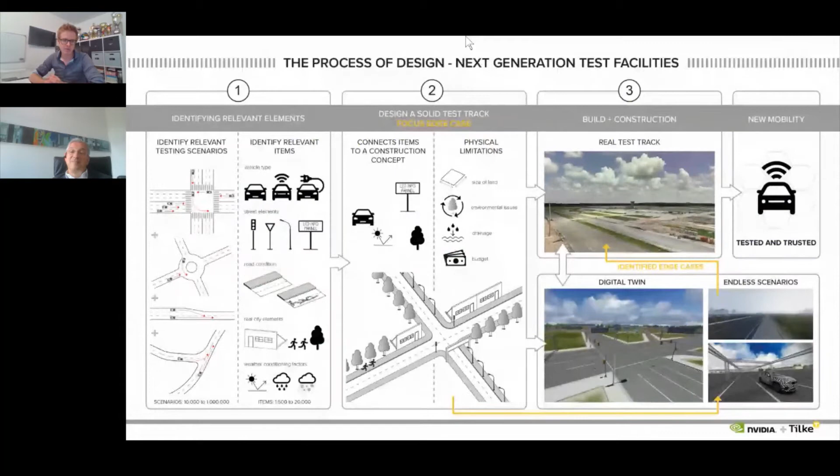Thank you. As Manuel mentioned, there's no better way to test an automated driving system than in the real world, whether it's on a test track or on public roads. The level of fidelity is really unmatchable by simulation, but there are obvious limitations with testing in the real world. The resource issue already mentioned, the scalability, the time - this is all a real bottleneck for the deployment of automated vehicles.

If we could only test in those real world environments, in order to generate enough evidence that can be given to an approval authority or an assessor to demonstrate that the ADS is robust, reliable, and safe inside the entire ODD in which the ADS will operate, we need other mechanisms to generate that data. We need to use simulation to support this.

At NVIDIA, we use simulation at multiple points during the development and what will be the certification of our automated driving systems. We have point 3 here, which mimics what Manuel's been saying about doing the testing - both the automated driving system on a track, and in the digital twin, where you have closed loop testing with the full AV stack. This is with the complete tool.

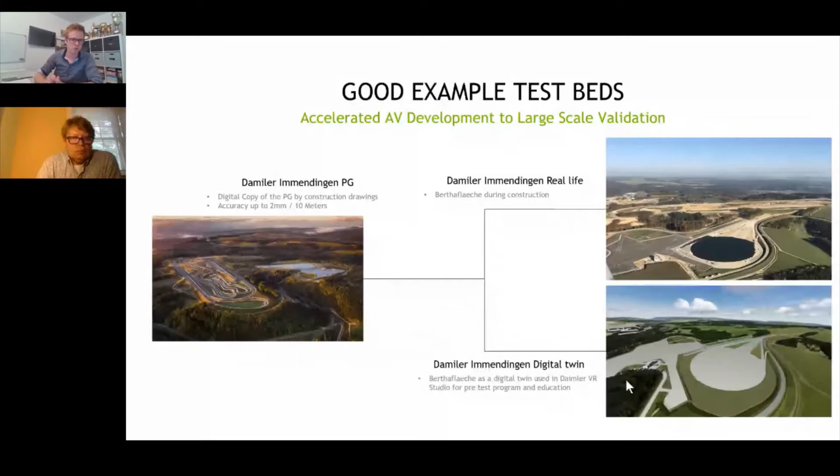Thank you. So now going back to the digital environments, the majority of these virtual testing tools are run on game engines, and this is something that at NVIDIA we're moving away from. At NVIDIA we love game engines—we have a rich history in computer graphics technology. They generate beautiful images, but we don't believe at the moment they are fit for purpose with regards to the assessment of automated driving systems.

We need physically accurate sensors. We need timing to be incredibly accurate. Without having this level of accuracy, you generate non-deterministic effects within the simulation tool, and it would really prohibit the efficiency of regression testing—when you run the same test with the same input, tuning your path planning control algorithms, or with an updated DNN.

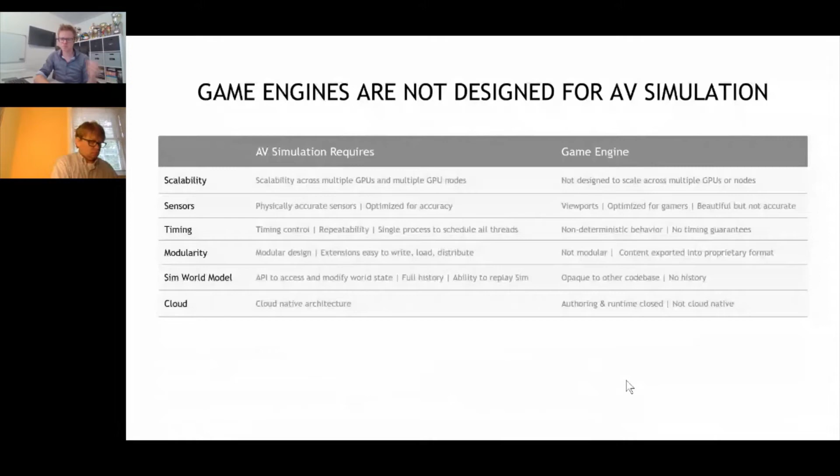So one thing that we've done at NVIDIA is to move away from the game engine we were using before, and now we've created our own platform called Omniverse. Omniverse is essentially designed from the ground up to be a simulation platform for autonomous driving systems that looks at graphics, but also looks at physical simulations and makes something that is really fit for purpose with regards to ADS testing.

It was architected to be on a large scale, to be operated not only just on someone's desktop, but also in the data center, in the cloud, where we can have multiple iterations that will increase the efficiency of testing and make something really worthwhile.

With our Omniverse as well, we've also implemented our RTX technology. This is real-time ray tracing that is far more accurate at representing radar, LiDAR models than what we had with previous tools, where we're just sort of rasterizing the images and making assumptions about where or how much reflection we get from that object.

With ray tracing, we can really look at how light interacts with an object, how it's reflected at different angles, and have something that is far more usable.

One thing we also did was build this Omniverse on Pixar's Universal Scene Description. This is used to describe 3D scenes and works very well with the Omniverse platform.

Yeah, thank you, Barnaby. Thank you very much. Because of a matter of time, I would prefer to take the questions into the panel, or Barnaby and Manuel, if I saw that Manuel already started questions, that would be great. Thank you very much, gentlemen.

I think I just got notified that we should be able to have Philip Schreiner joining us for his presentation from the Autonomous. Is he there?

There he is. See and hear me now. Hello, yes, sorry for the inconvenience. I had no problem, Philip, we were able to manage. No worries, everything is fine.

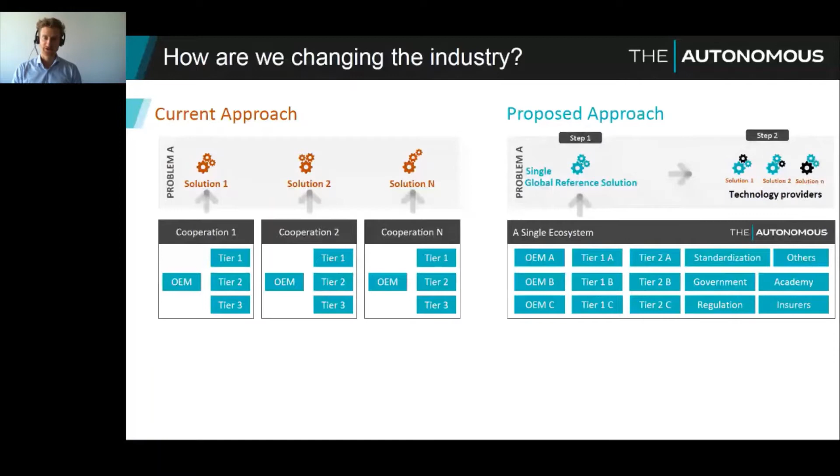Of course the tiers counting into the automotive sector, but also the lower part is important. So also academia, research, partnering, for example, with Fraunhofer Institute and other research institutions, the cities, legislation, and so on. This is really for us the ecosystem that we want to gather to jointly collaborate on the autonomous.

So this is actually why we're doing this. And now, of course, the big question is, how does it look to actually achieve this big vision? I would like to show you two streams that summarize quite well what we are doing: on the one hand side the event stream, and on the other side the innovation stream.

Start with the event stream. So of course, having an ecosystem always involves people. In the end, it's the people, it's the experts with the solution for concrete problems, and that's why you need to bring the people together.

And this we do during COVID, the COVID pandemic, we launched our Chapter event format. It's a fully virtual format which we usually planned to have in a smaller setup, but then it turned out the feedback was so good that we actually host Chapter events with up to 500 participants. The idea here was first to get the experts together, for networking, but also to start defining possible safety challenges where this alignment is needed.

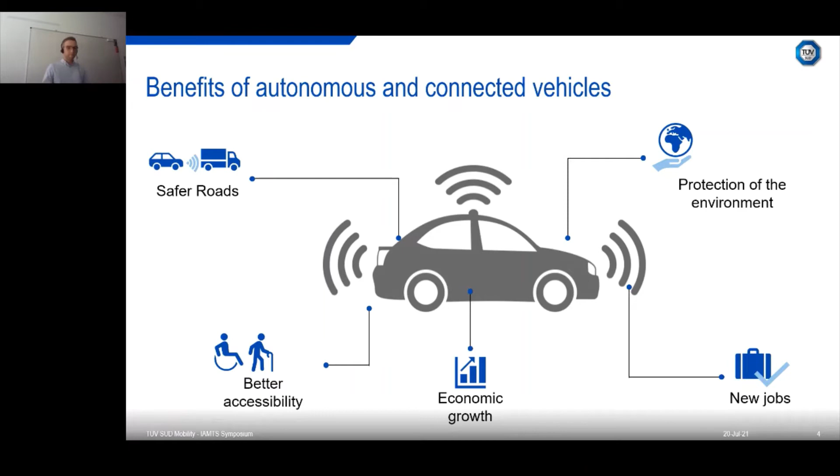But however, there are still some obstacles to overcome for this to happen. But what does it mean from the point of view of a testing, inspection, and certification company like us at TÜV Süd? So let's jump to the next slide.

I think Alex also mentioned it. Today we look at individual vehicles for approval, but in the future this will no longer be sufficient due to networking, for example. We would therefore have to look at intermodal mobility. And today we look one-dimensionally at vehicle safety.

Vehicles, for example in Germany or the European Union, are inspected at defined periodic intervals, and driver assistance systems are interrogated electronically. In the future, however, this will no longer be possible because cybersecurity, functional safety, and other topics that have not been included in the scope of periodical testing to this day will have to be taken into account.

Also, due to the constant changes and adaptations, it will not be enough to rely only on fixed time intervals, like, for example, 2 years. A new car in Germany is checked after 3 years the first time. For this solution, it will be needed to enable and check continuous adaptations of these vehicles.

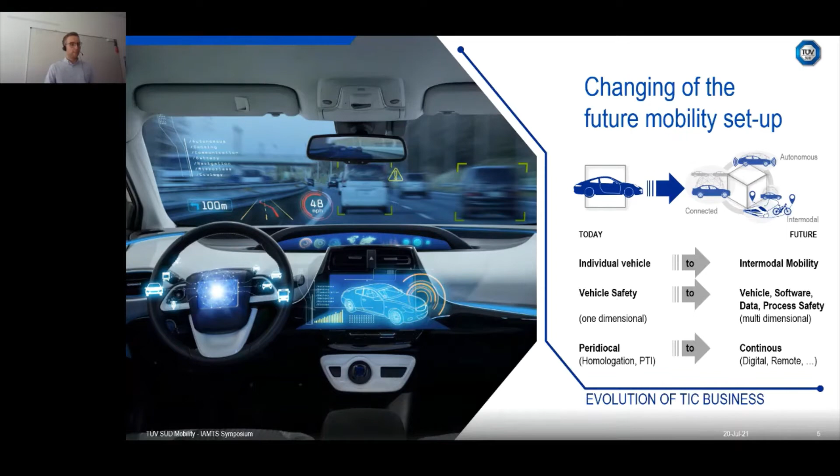For example, the UNECE regulation 157, which regulates automated lane keeping, is one of the first examples. Another one is the German Act on Autonomous Driving and the Autonomous Vehicle Approval and Operating Ordinance. It's called the AFGBV in Germany.

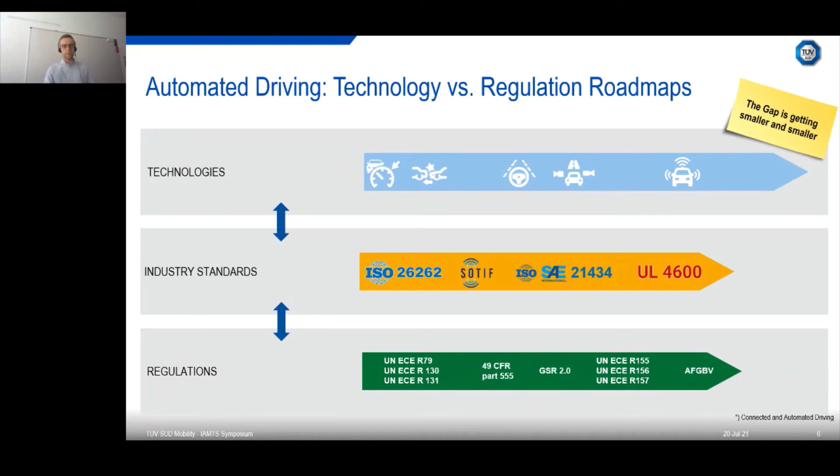But what are the opportunities for level 4 vehicles internationally? Today, I would like to focus on Europe and the USA and only briefly touch on China. My colleague Joseph will go into more detail about the Asian market tomorrow. In addition, I would like to show you how a level 4 release can look like using the upcoming German Act as an example. So let's start with the activities on a UNECE level.

As the UNECE has already recognized, for a successful rollout of new technologies it is necessary to define requirements for the technical systems and also for human behavior. The legal act of the UNECE, the Geneva and Vienna Act of 1949 and 1968, provides the framework for this. For this purpose, the UNECE defines technical requirements for such systems in the Working Party 29. Therefore, the Working Party has defined a framework document to create the necessary conditions for such global harmonization, to enable highly automated driving - that means level 3 to level 5.

The special thing about this is that these developments take place on the basis of two agreements, the 1958 agreement and the 1998 agreement. This means that the created requirements and test methods can be applied internationally in all relevant markets. For this purpose, 13 key issues were created that are valid for all participating countries to establish a uniform process. Also, to achieve this goal, several working parties were established under the Working Party 29 of the UNECE. One of them is the Working Party on Automated/Autonomous and Connected Vehicles, the GRVA, which is the umbrella of all relevant automated and connected driving activities within the UNECE.

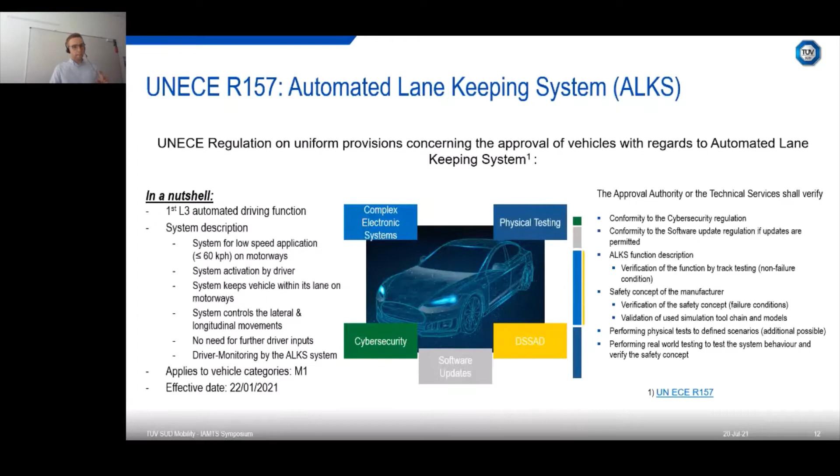In general, these are the puzzle pieces that are also intended for future releases of AD systems. ALKS is a level 3 system, but it will also be interesting for level 4 and 5. These missing puzzle pieces are also part of the FRAV and the VMAD, and they are under Working Party 29, also trying to close that gap and find the missing puzzle piece.

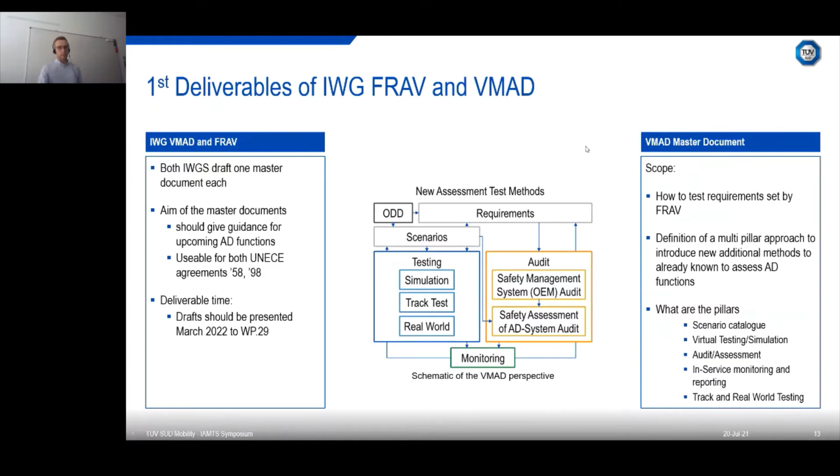So after the UNECE, let's go over to the United States. Here, in addition to the regulations of the US federal government, there are also requirements from each individual state. The NHTSA specifies minimum safety performance requirements for vehicles and equipment. The manufacturers must certify compliance before selling a vehicle, but an automated vehicle would not meet the current requirements.

But the NHTSA can approve a limited number of exemptions from the regulation, for example, a vehicle without mirrors. The individual states are regulating the licensing and usage of vehicles. This means that the test release is made by these states. But the states should follow recommendations from the federal government. This means that there are no harmonized regulations for automated vehicles in the US that apply throughout the complete country.

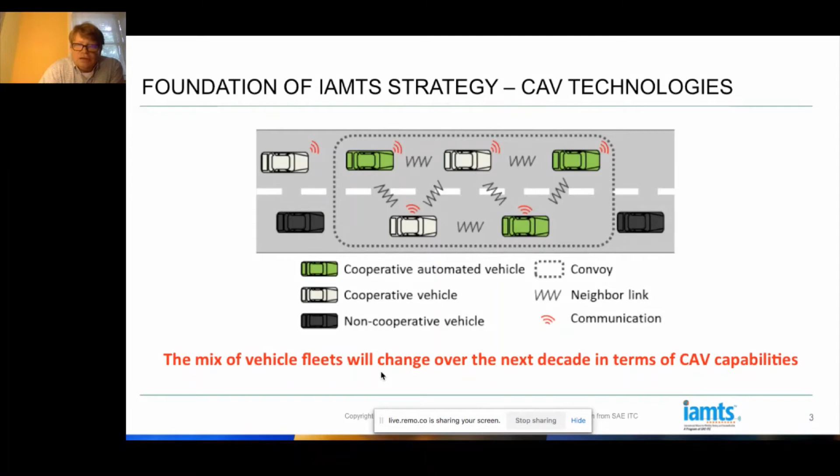And that comes with its own challenges. So if we look at the standardization situation, we are all currently at the verge of moving to 5G connected smartphones and also 5G connected vehicles. But we already have standard developments towards so-called 6G, which could arrive in around 10 years.

That means we need to look into the standards development cycles as well as the standards deployment cycles, which obviously overlap. We also need to look at the implementation of these different SAE levels, like level 3, 4, and 5, where at the moment the industry is really commercially focusing more on level 3 systems. But from a standardization and certification perspective, we need to get ready for level 4 systems as a next cycle, and then ultimately for level 5. So that standards development situation is very important.

And then we also have standards development that link to the internal network in the vehicle. So we have to look at all those developments in parallel.

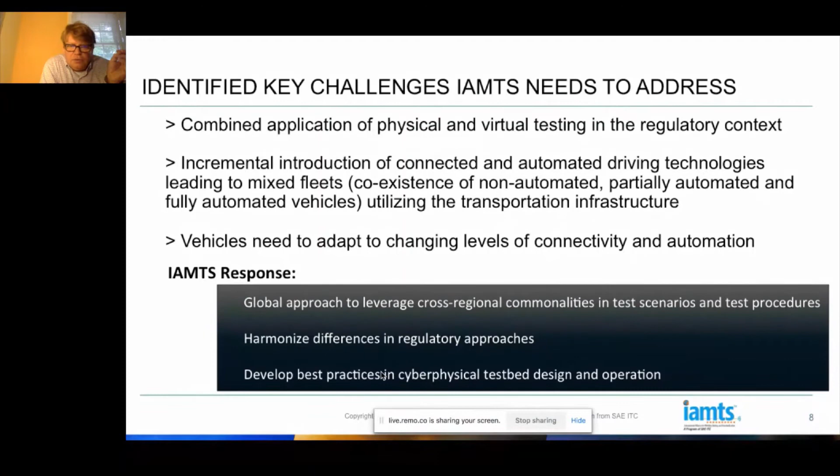So our approach is that we need to have a global approach to leverage commonalities across the regions in test scenarios and test procedures. We want to harmonize the differences in talking to the regulators, talking to the experts, and to develop best practices in the design and operation of cyber-physical test beds.

So we formulated the following strategic goals for IAMTS. Obviously IAMTS should facilitate the market introduction of L3, L4, and L5 vehicles according to the SAE levels by accelerating or basically advancing harmonized test methodologies, test processes, test beds, and test tools for the certification in the different regions and regulatory regimes.

We need to help find the optimal mix of virtual and physical testing in blended test environments, where we need to constantly update this mix because there will be progress in the simulation tools and the capabilities of the tools, but there will also be upgrades in the design of the physical test environments. So we need to constantly look at the optimal mix.

We also need to understand which capabilities do we need in these cyber-physical test beds, so that we can ensure operational robustness, both for the complete system, but also for the subsystems, and very important for the infrastructure side in the different operational design domains.

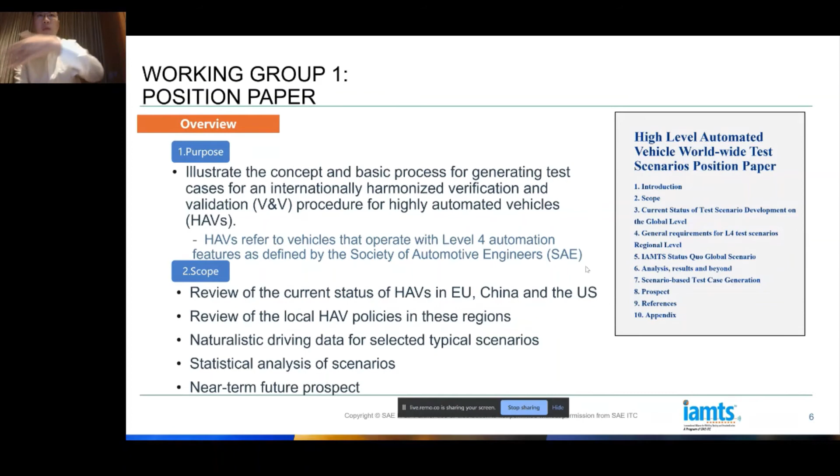After that part, we went through general requirements for level 4, looking at different regions in general. That's the main part which is interesting in this working group. This is the part we've actually compared, for describing typical scenarios, what kind of parameters or variables we're using, which ones are more crucial compared to others, and how those things can be compared and aligned in different regions. So this is most of the discussion in working group 1.

Then of course we look for different requirements, and before you do the testing, there's prior knowledge you should understand or take into consideration beforehand. This is something we're discussing as well, along with methodology for scenario-based testing. But at this stage, we're not done with the part where all the scenarios are well defined and put into a well set up scenario kind of configuration. This means what we're looking at is more like analysis beforehand, before we actually do the testing, this prior knowledge on what we can do with scenarios before doing the testing part.

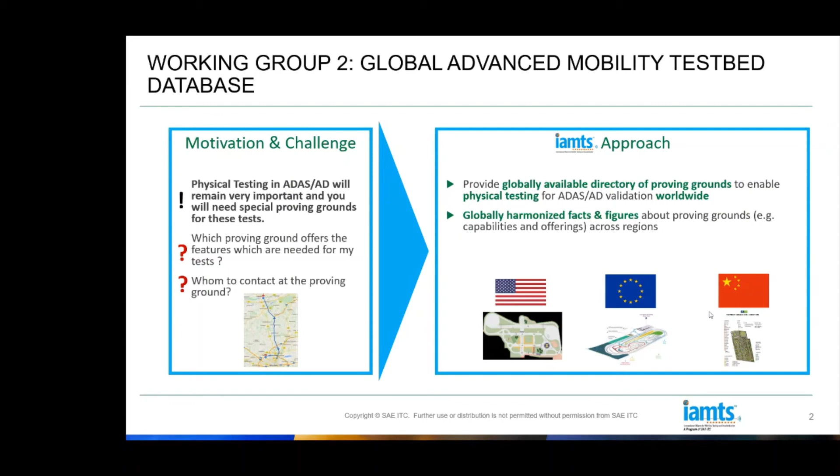In working group 2, we don't want to develop any new requirements or new regulation standards. We want to use the existing standards and regulations and develop some industry generally accepted rules or specification, and we call this the working group 2 specification.

In this specification, we want to describe the testing tracks and their facilities, including closed test beds but also open test beds. In order to identify the interest from the industry side and build this platform, we are also publishing our white book from our perspective, to demonstrate our database.

We have already implemented a web-based database, and there we have already registered more than 70 test beds globally in our database, using the unified feature description.

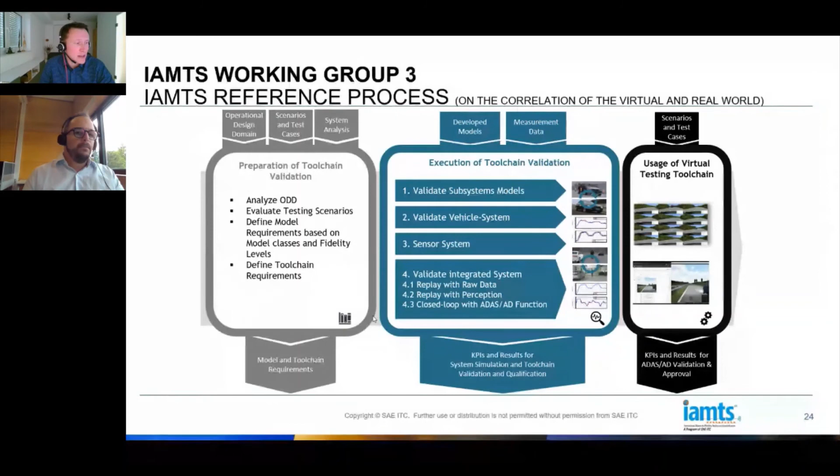And then we go into the integrated system, validating it also with three steps. First we replay raw data and compare simulation and real world. Then we replay with the perception, looking if the perception is working in the right way, and compare real world to the virtual world. And then really at the end of the process, doing a closed loop test. For all of these things, we need KPIs to compare and also come to a result on whether the virtual testing tool chain is suitable for the use case.

One last slide, and then I want to hand over to the subgroups. What we did mainly in the last year, as mentioned, is work out, based on the experience of the different stakeholders and members, this reference process with some examples. This was already presented at UNECE. We also had a contribution to the ASAM Sim Guide, and I think most important, our first best practice paper, which you can download on the IAMTS webpage, describes this approach and process, and is the base for the upcoming activities.

And what does it mean, upcoming activities? As mentioned, we decided to go a little more into the details, to use this process with concrete examples and show how this process can be applied. We selected not the classical vehicle dynamics domain, but these new areas, the sensor system and environment model. For these things, we defined our two subgroups.

Subgroup 1 is focusing on the LiDAR sensor model, subgroup 2 on lane modeling. Lane modeling seems quite easy if you hear it, just lines in simulation, but it's actually quite a complex thing. Both are related to the UNECE regulation on automated lane keeping. You also see on this slide the different partners of the subgroups: subgroup 1 has Virtual Vehicle, CATARC, Velodyne, and dSPACE; subgroup 2 has NVIDIA, 3D Mapping, and Retrospect.

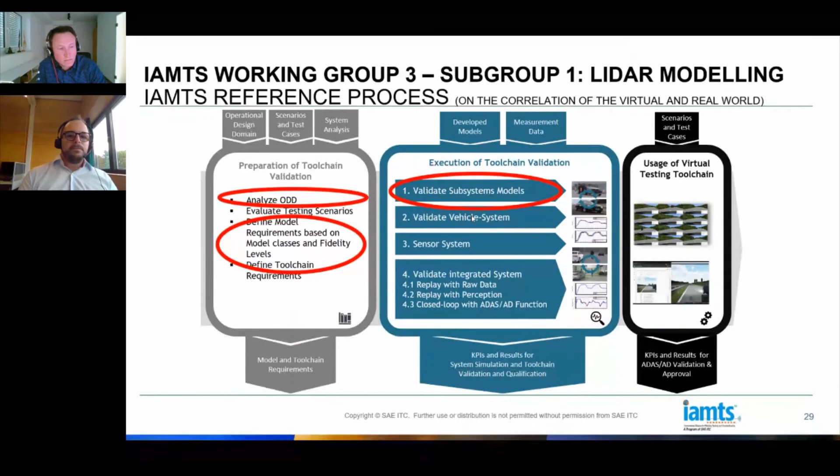In what context are we doing this? That was a perfect switch. We can use the simulation framework from dSPACE as an example, as they also have these steps of the process: preparation, simulation, development—you can see this on the top—and later an analysis. So now the slides are gone, Tobias.

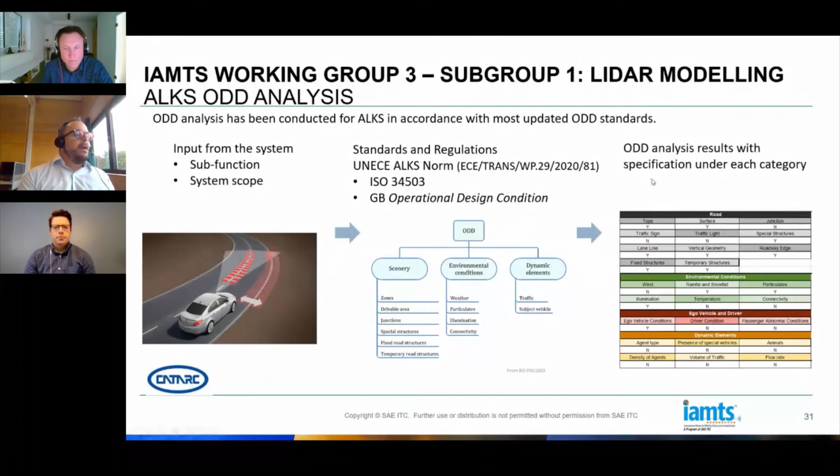Indicating relevant areas where we need to specify requirements for the sensor models. The next step is figuring out what kind of sensor effects need to be modeled. As I said, we are looking into different fidelity classes. This can be, if sufficient, a sensor model with rather low fidelity, just simple field of view, or we will also move to higher fidelity where we consider reflectivity effects and scattering.

We would like to summarize this in a position paper, or a best practice paper, that should then be presented. The target would be ITS World Congress, which is happening in October. So what are the next steps? Definition of the sensor requirements, identification of the relevant model properties we would like to model, and also describing the challenges for model integration as an example for the reference process.

So I tried to keep it short and brief and on time, and would like to hand over to, I think, Michael as the next speaker. Right, thanks Jacob, perfectly on time.

Michael, you are muted. Michael, can you hear us? You're muted. No. Try it one more time. How's this? Now we hear you. All right, all right, hi Michael.

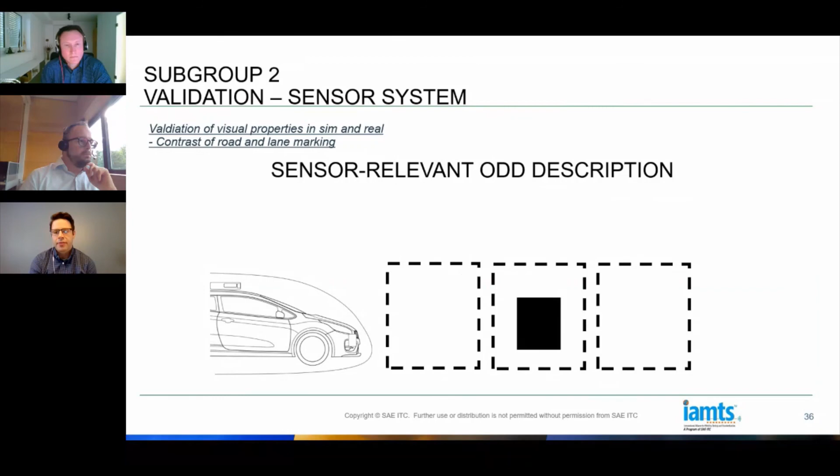Just a simple breakdown here of how we take the complex environment - this can be used in a variety of ways, not just for lane keeping, but we focus on our target. Then we focus on two other aspects of the target: you can have the background component and the foreground component.

This can be used as a simple model for any sensor interface, but in this case for the camera. The target here would not be a vehicle or another road user, but the lane, and we'd want to consider various foreground conditions - things like fog or debris on the road, anything between the target and the camera - as well as background conditions behind the target. Those two things help make the target more perceptible, or not.

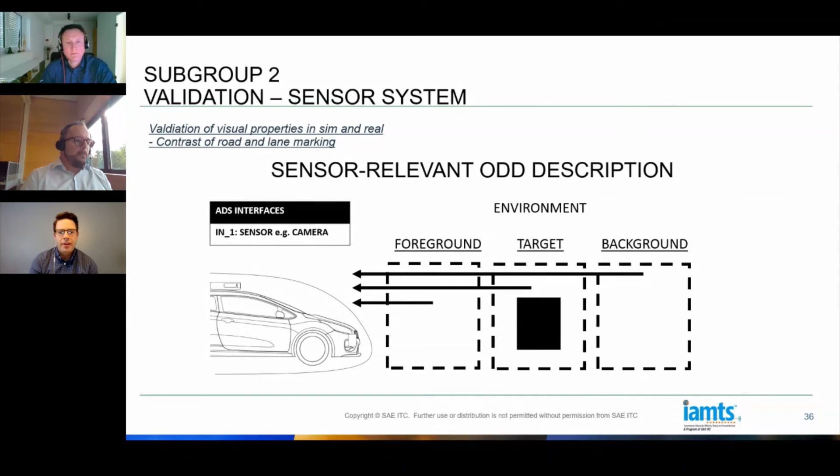We do the same thing with foreground. We can take infinite combinations of rain, snow, fog, sand, etc., and organize those into: is this making it very easy to detect all the time, is this average or nominally difficult, or is this an extremely difficult foreground condition? Likewise, the actual target, the lane itself, may have varying degrees of difficulty - freshly painted lines, normally faded lines, or almost non-existent ones.

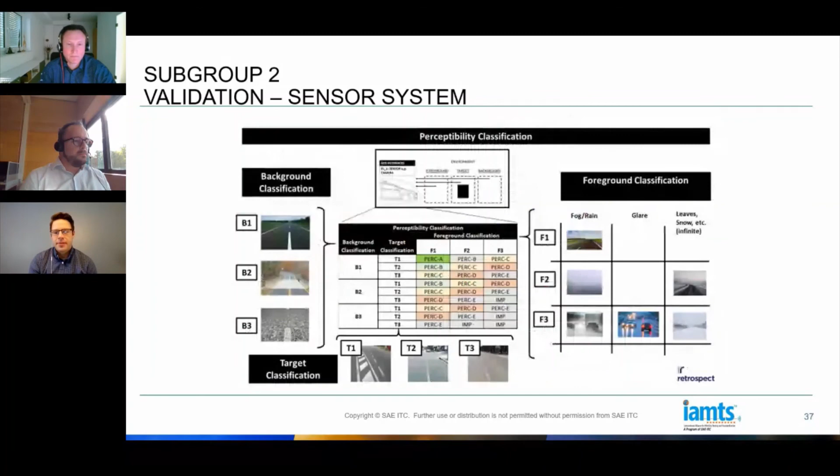You can keep moving on. One example is how we can actually quantify this and make it more relevant, not for our own perception, but for the perception of the camera. There are various characteristics and KPIs useful for cameras. We're showing an example here of contrast ratio, but you could look at pixel rise distance, which indicates the sort of fuzziness.

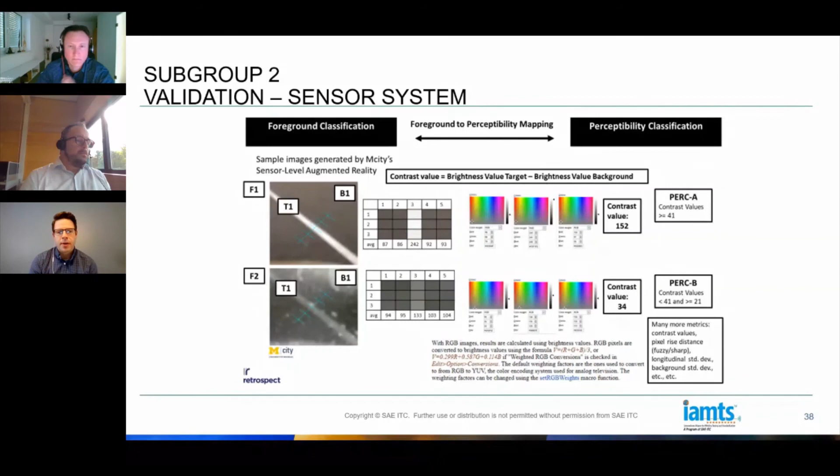You could look at the longitudinal properties of the lane or target to describe how normal the brightness is centered around a particular value, or the color centered around a particular value. This is just one example of showing how we can quantify what's relevant for the sensor, but also what's relevant for our environment. Next slide.

It's been great to work with NVIDIA, who specializes in virtual simulations, as well as 3D mapping, who specializes in physical road measurements. And then Retrospect brings functional safety expertise - we're bringing the safety requirements, and one key aspect is being able to show that we meet a certain performance under certain conditions. The end goal is to show that the actual data collected in the real world can fall into these categories we've laid out, giving us a simplified yet comprehensive and complete framework on which we can validate the performance of the lane detection system.

I think that's about it. There may have been a couple other points that Barnaby wanted to mention, but happy to answer any questions later on. Thank you, Michael.

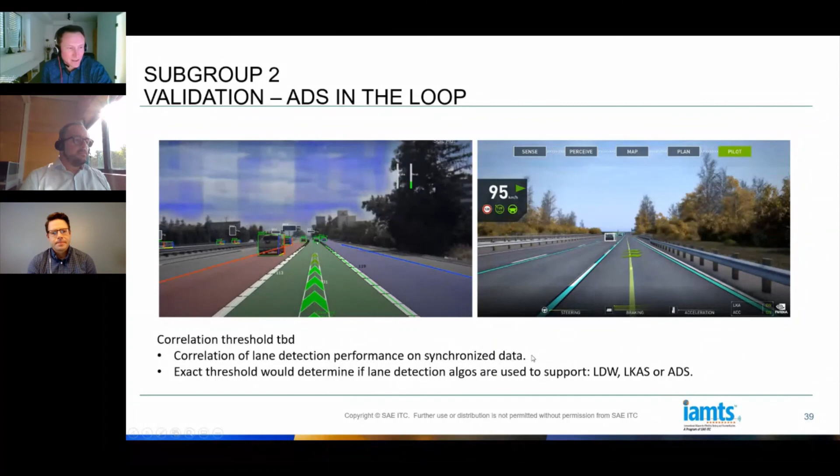There he is. Okay. Yeah, like the rest of the team, I'm struggling with this new platform. So thank you, just a second here. Cool, so I will share my screen in a moment. Just a second.

Can you see it in the presentation mode? Is it in the presentation mode, or is it like the rest? So try one more time, and then it should be. Yeah, I thought I'm special and I'm going to make it from the first time, but no, I'm not. Okay, you will make it as everybody. Just stay cool. Well, now that you said it, Alex, I'm starting to shake.

Stop sharing again, and maybe share again, and then select full screen sharing. Yeah, here we go. Here we go. Perfect. Yes, it is.